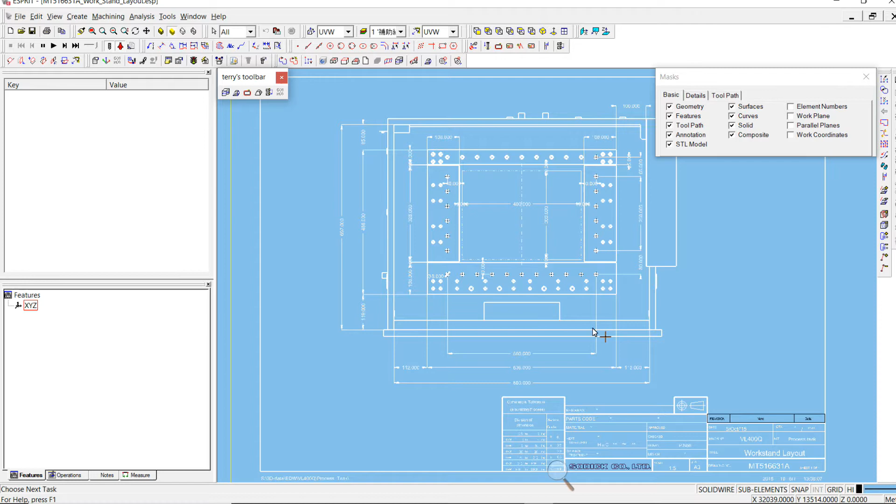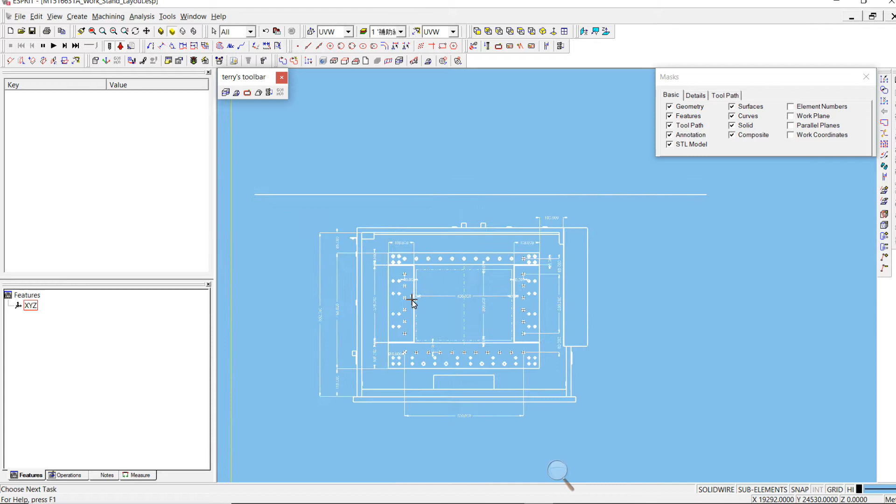So when you're in your CAD/CAM software, you're going to have a drawing file similar to what I have on the screen here, with a title block, dimension lines, and zeros in the wrong spot. So you may want to consider, before you create the wire toolpath or DXF file, to just get rid of everything you don't really need for the wire machine. You can do these steps in the HeartNC software if you don't want to do it in your CAD, but you might find it more convenient to use your CAD software to just delete out what you don't need.

So I'm just going to do an example here. I've minimized all the dimension lines I kind of don't really need. Let's grab a couple more here and so forth. So delete out what you don't need.

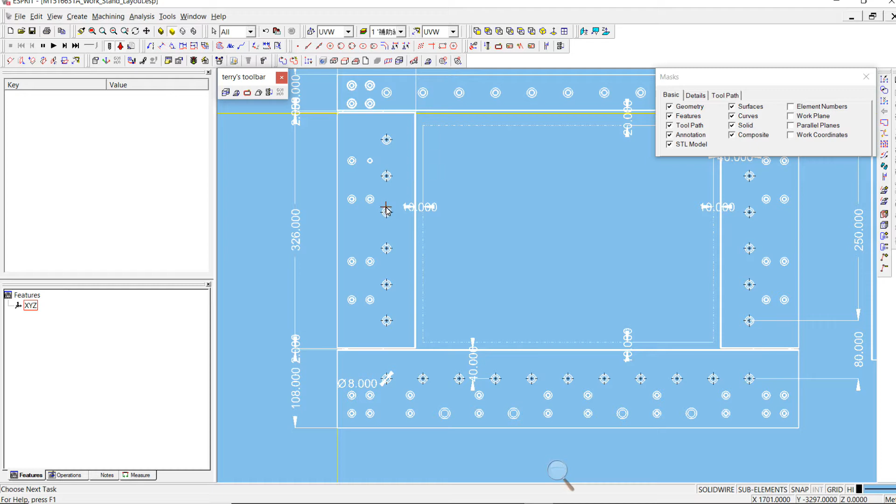And in your software, you probably have a way to move the program zero. The program zero could be the corner of the block or something like that, or maybe it's one of these holes already in the block and you want to pick up on that. So consider doing that step in your offline software.

I've got 0,0 placed right here now. Let me zoom up on that. So it's at the corner of that block instead of being off in space. I've got it at that corner of this workpiece. If I was going to cut this out, maybe that's what I want to do, the corner pickup for the wire machine.

So anyway, once you have your file configured the way you want, you just create your DXF file. In this software you go File, Save As. Some other software you might have File Export or something like that, but here it's Save As. In the pull-down you can select it to be a DXF file.

And now the naming, we're going to change the name. This has got some long file name. HeartNC will not allow you to put in a long file name, 8 digits max. Let's simplify that. Just go with...

Test 1. And we're going to go on our USB drive and we're going to go to the UTY folder. So, test 1.

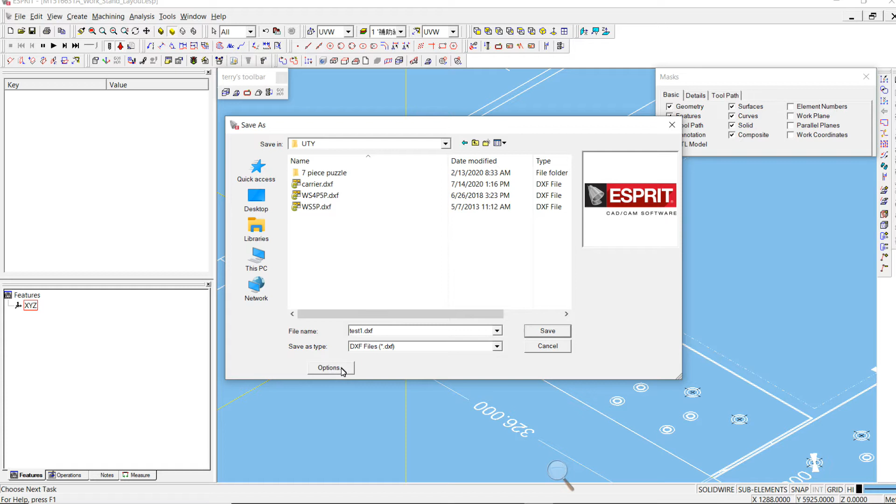DXF. Now, in the options here, we have a way to set the version level of our DXF file. So you want to make sure and use a version file. Go down in the versions, you don't want to use too new of a version, it won't open on HeartNC. So set your, if you have an options button, maybe there's a parameters button down here, do that, set an older version, and say save.

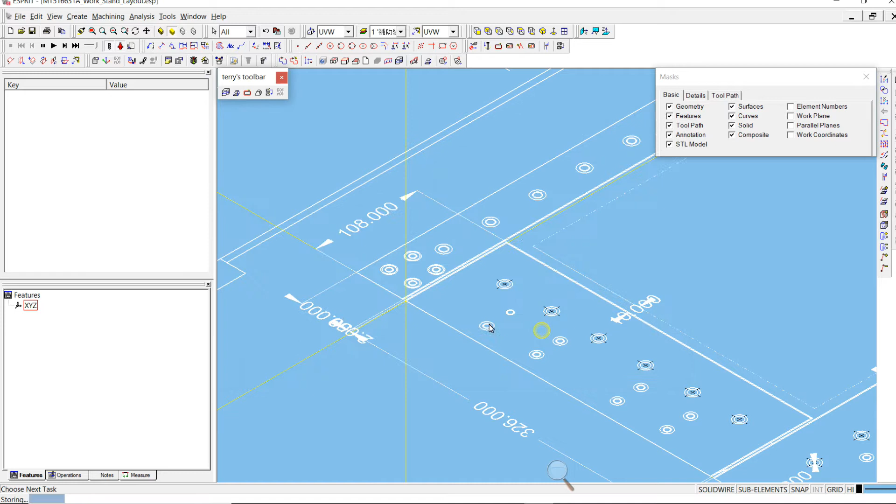So that'll save it onto your USB stick. Let's minimize this page here. So now if we look at our USB stick, we have our test 1, and that's the one we just made right now, and some other ones I've got. So that's inside the UTY file folder on the USB drive.

Next step is to bring it out to the machine, and I'm going to show you this step through some pictures. You're going to come up to the machine, and the machine's going to be maybe on this first page, manual, codeless, coordinate set. That's the first page the machine boots up to. Okay, so maybe it's at that page.

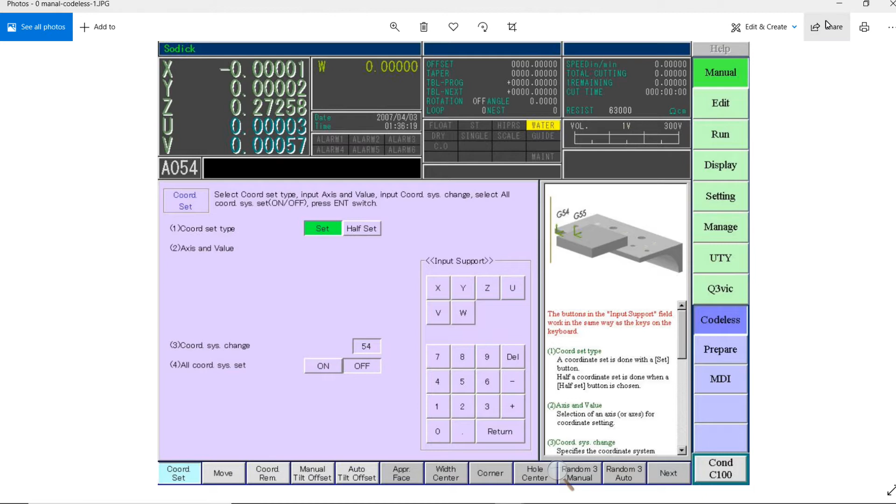When you stick the USB in, you're going to give it a minute, and it's going to say EXT memory, it's going to pop up here in the top. Let me close this picture. See, it says EXT memory, so it takes it a moment, wait for that to pop up there. Now it's read the USB and it's ready to go.

Next step is to press this UTY and File button. And then you will have this, looks like a Windows Explorer type screen. Click on External Memory here, and then your titles that you just saved will show up on this right-hand side of the screen. Once you see your title, grab it and drag it into HeartNC. So this picture right here is from the LN control, your VL machines, your VZ machines, and older machines look like this.

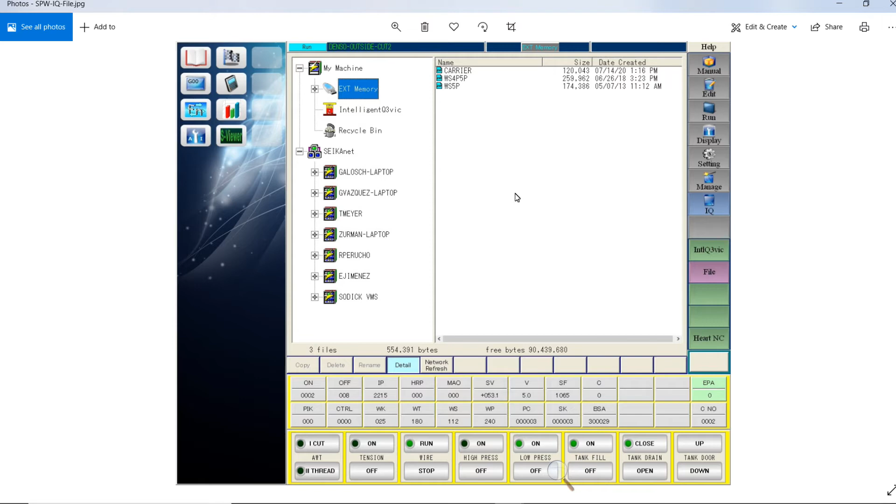Let me show you the AL machine. The screen is similar, just a little bit different from the AL machines. Let me zoom it a little bit because it's got more stuff on it here on the left. We don't need that.

Notice the icon is a little different. It says IntelligentQ3vic instead of HeartNC. So what you would do is the same thing.

You go IQ button and then File, and then click on your external memory, and there's your files. Click on your file name, and then drag it into IntelliQ. You can window more than one and drag it in there. That's fine, you'll copy them all into that.

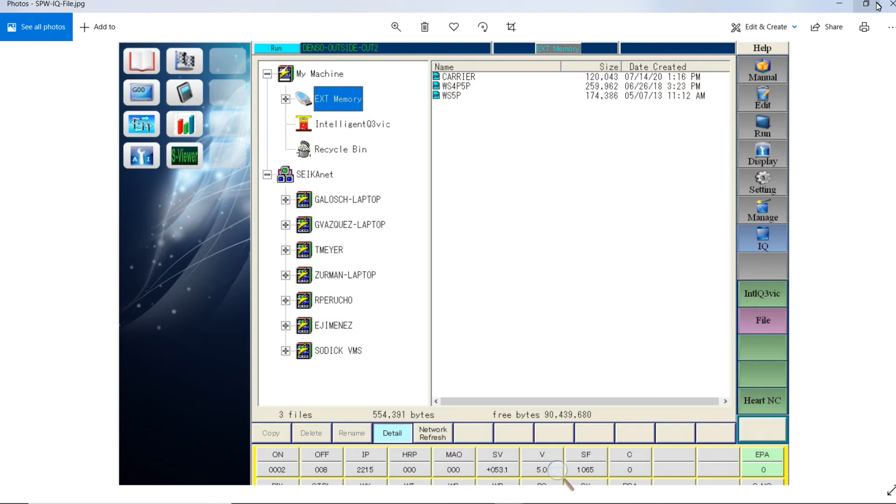So your first step to being able to program on the machine is you've got to transfer that file with this IQ file button, or that other, the LN control UTY file button, and drag them into there.

Now, if you're on the network, then you're not going to use the USB. You're going to click on your SEIKAnet, and then this is going to be a list of your computers. Maybe you only have one computer listed here—this would be your office computer, or maybe a folder on the server.

You would click on that, and then the titles will show up in here. This is going to be the shared folder on that computer name here. The shared folder is going to be called 3D Data in your system.

This machine, the Sodick software, will display just the contents of that folder and any folder below 3D Data. So you could hit this plus sign and have folders below 3D Data. Once you open the proper folder, you can click your file name and drag it into HeartNC, or if it's the SPW control, drag it and click it into that other icon that says IntelliQ.

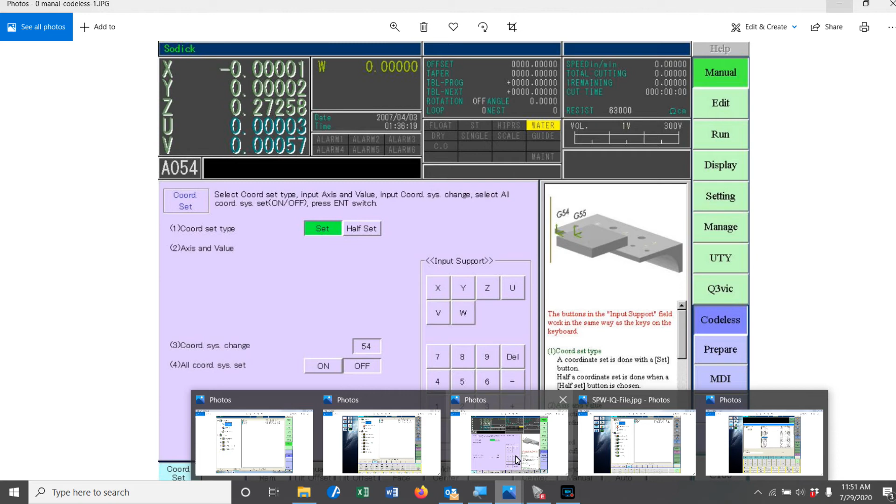All right, so once we have the file into the machine, that's the first step. Now we want to probably open the file, and it's going to be a little bit different.

Let me get this going here. We'll open the HeartNC—I'm using the desktop version, so I get a question here, metric or inch. This is going to follow your machine tool setting. You're not going to get this question at the machine because the machine is already in a certain mode.

You hit the HeartNC button at the bottom right in your control, and you're going to get this window now. Now that we've transferred the file, we can open it with this file button over here on the left. You hit that and you've got an open button. So once you move your DXF files into the machine, you can hit that file open.

Now this screen here, because I'm on the desktop version, doesn't actually match your machine, but it's kind of the same idea—you're going to have your files here that you can click on and open. Let me just close this out and show you what your screen will look like at the machine.

Okay, so when you click and go into HeartNC here on the right—you know, IQ, HeartNC—then you click this file button on the left, and up comes this file open page. See, it shows you this directory tree, My Machine, and disk.

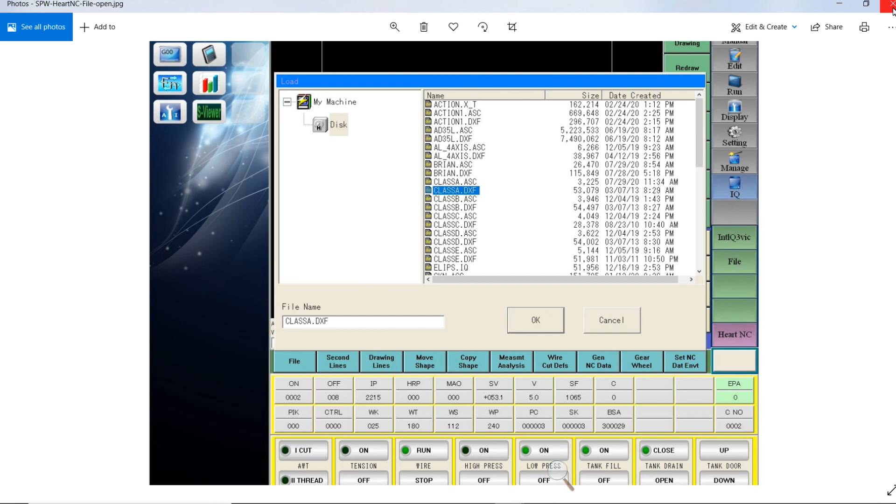Let me just show you that real quick. Let me go back into my desktop HeartNC, file open. I've got to set it to DXF, and I can just pick one of my DXF files—boom, and it opens. So that's how you would transfer the file into HeartNC, whether you have the LN control, LN2W control, or the SPW control—kind of the same steps.

We'll continue on with how to program the part in the next video.